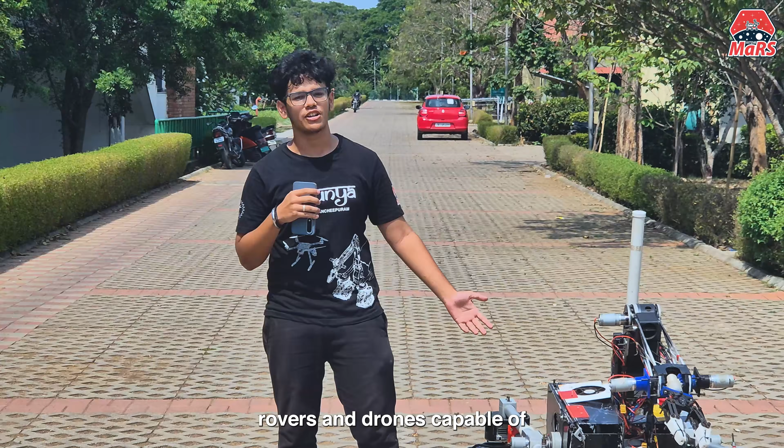Hi, we are Team Shunya, the Mars Rover Students Club of IIITDM Kancheepuram. We are an interdisciplinary team of 25 plus engineers from various backgrounds, mechanical, electronics, software, and science, all united for one goal: to design and build autonomous rovers and drones capable of navigating through some of the most challenging environments on Earth and eventually beyond.

Our team is headed by a team lead, assisted by a technical lead who oversees all technical operations, and a team manager who takes care of planning, logistics, and everything that keeps the team running smoothly behind the scenes. Each of our 6 sub-teams, mechanical, electronic, software, science, drone, and management, is headed by a dedicated sub-team lead who drives their domain forward and ensures every piece of the rover comes together as one cohesive mission.

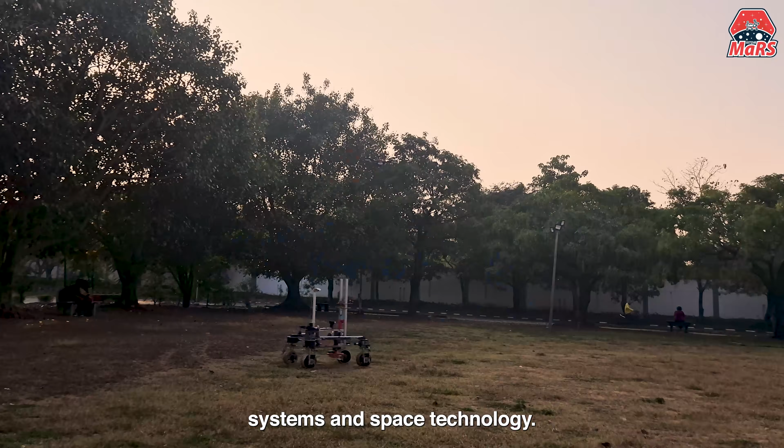Why ERC? At Team Mars, we are continuously driven by a relentless passion for autonomous systems and space technology. Over the years, we have continuously pushed our boundaries, achieving 4th place globally in the ERC Remote Edition 2025 and earning top innovation awards for our autonomous navigation stacks.

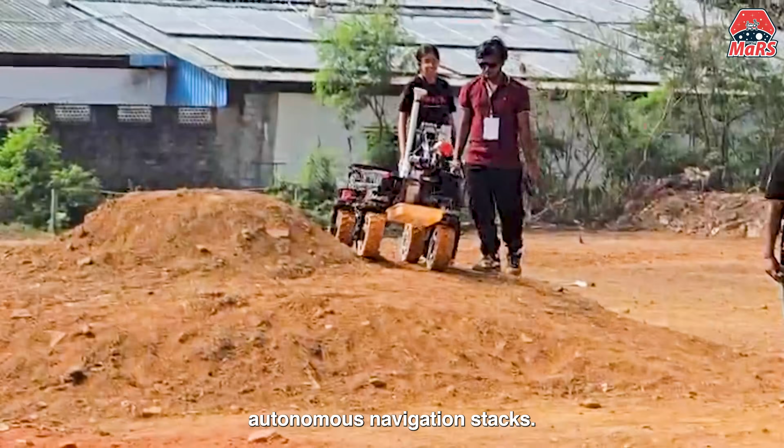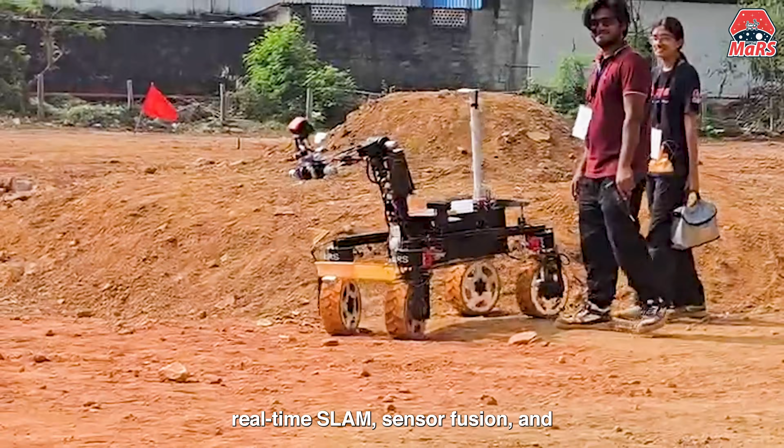We are running in ERC 2026 because there is no better proving ground for testing UGVs in space analog environments. It is the ultimate stage to validate our latest advancements in real-time SLAM, sensor fusion, and robotic manipulation against the highest international standards. For us, ERC is more than a competition. It is a vital stepping stone in engineering the future of extraterrestrial exploration right here at IIITDM.

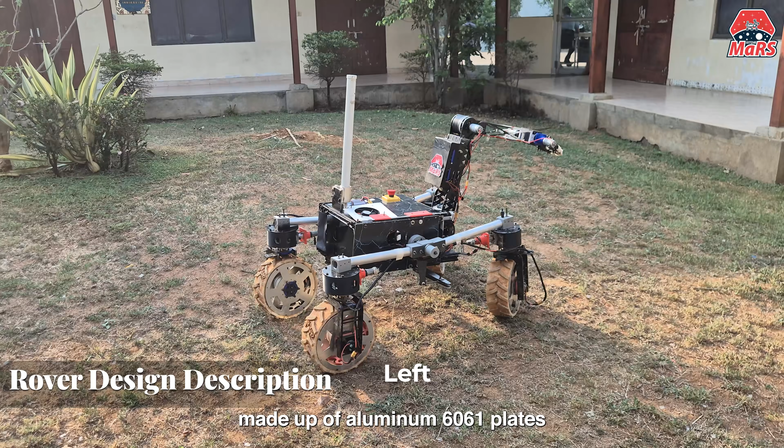This time we have developed a custom-made silicone grouser with a split chevron tread pattern mounted on a hybrid rim made up of aluminum 6061 plates and a reinforced PLA core. These provide excellent traction and shock absorption on loose and wet terrain, enabling the rover to overcome obstacles up to 25 cm. The wheels are driven by high torque 352 kgcm DC planetary gear motors through a bearing supported wheel mount for reliable performance.

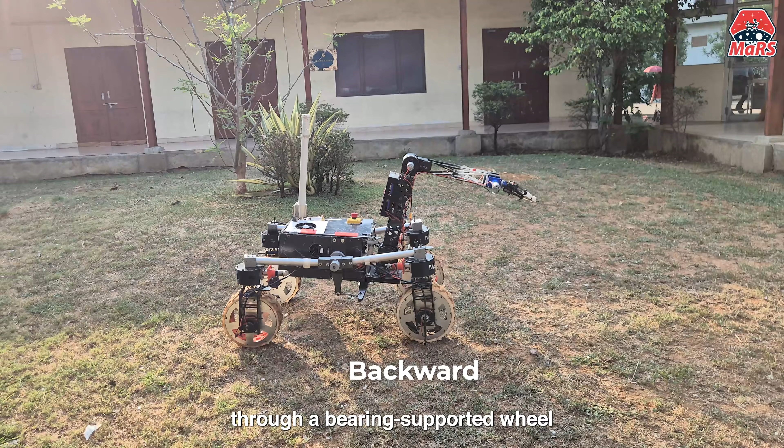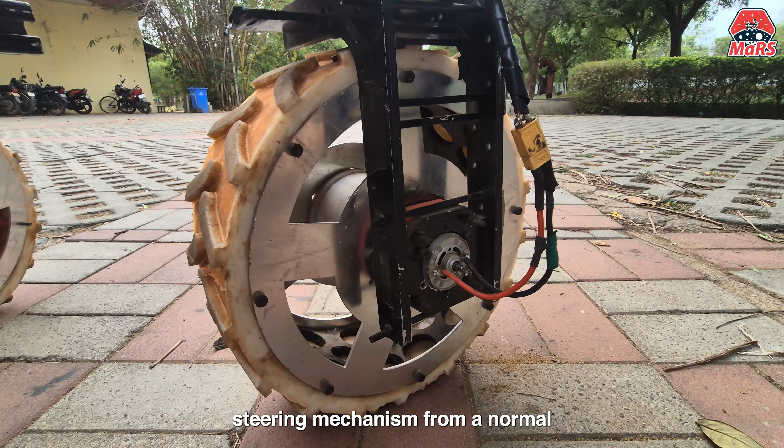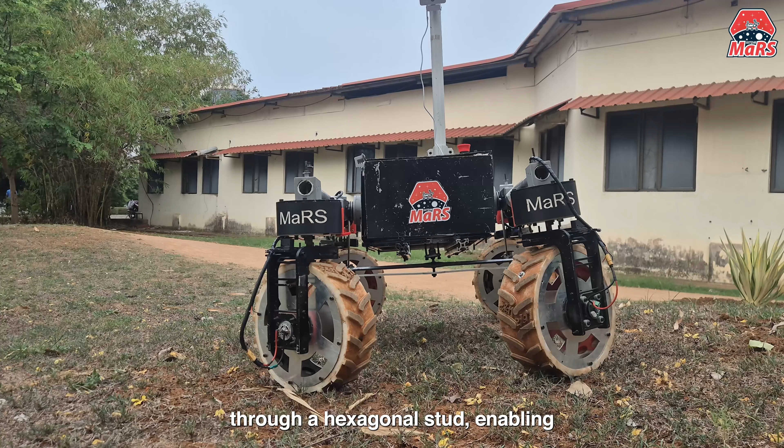The suspension integrates with a 4-wheel independent steering system capable of full 360-degree rotation. This time we upgraded our steering mechanism from a normal spur gear system to a 5:1 worm gear setup for more precise and controlled steering. The steering is powered by 150 kgcm DC planetary gear motors and coupled to the wheel mount through a hexagonal stud, enabling advanced mobility such as crab walk, spot turn and Ackermann.

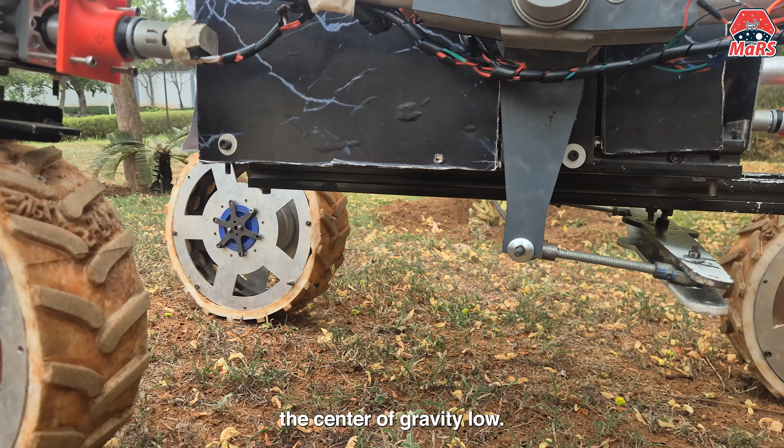We upgraded from a rectangular bar suspension to a 4-wheel V-shaped suspension with a cylindrical bar connected through a differential mechanism, improving balance, durability and ground contact while keeping the center of gravity low. Currently we are using 38 mm outer diameter aluminum pipes, with plans to shift to carbon fiber pipes for reduced weight and higher strength.

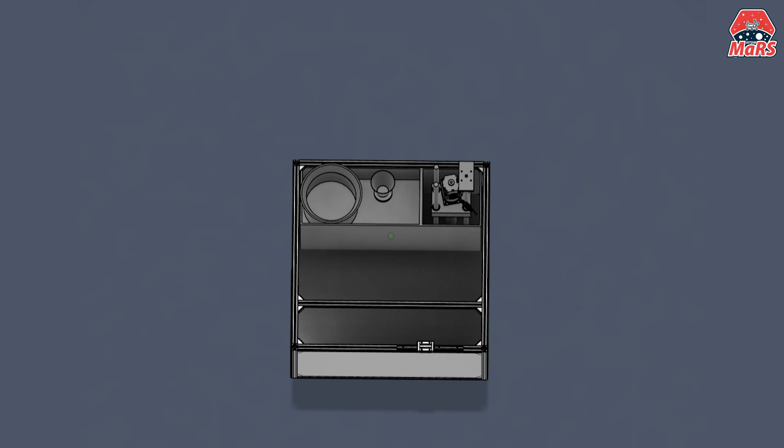The rover uses a 600 x 600 x 300 mm modular aluminum extrusion chassis reinforced with aluminum plates and a carbon fiber base plate for mounting electronics and software systems. The chassis is also integrated with the science cache and the manipulator arm on opposite sides for balanced weight distribution, while the suspension is connected through ball bearings and washers for smooth and reliable operation.

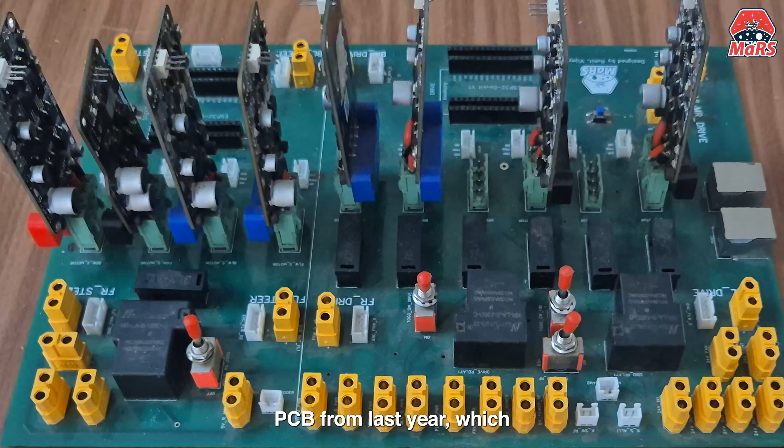At the core of our electronics, we use 4 ESP32 modules for steer, drive, manipulator and science, which use a PID loop mechanism for precise rover movement. We have upgraded our custom PCB from last year, which ensures better debugging and precise power distribution. We use a 24-volt battery supply, which is stepped down to 18, 12 and 5 volts respectively to control the motors and peripheral electronics.

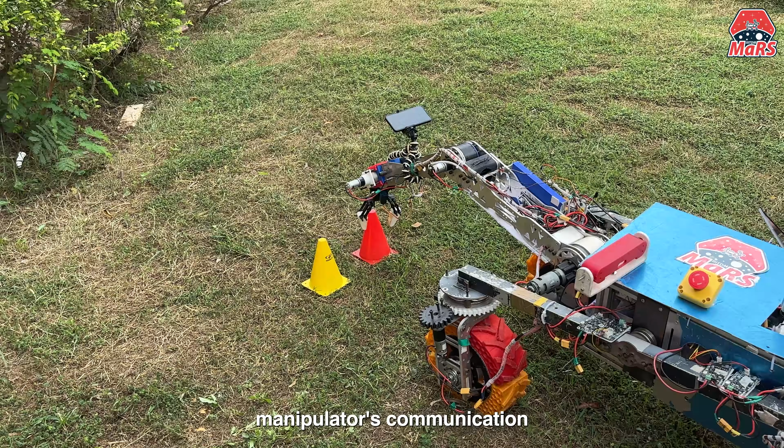We have also upgraded our manipulator's communication protocol from UART to CAN bus, ensuring better noise immunity and proper control over the motors. A relay-based kill switch is being used to control the power to the entire rover without affecting the communication system. A remote-based kill switch is being implemented which can be controlled from the base station.

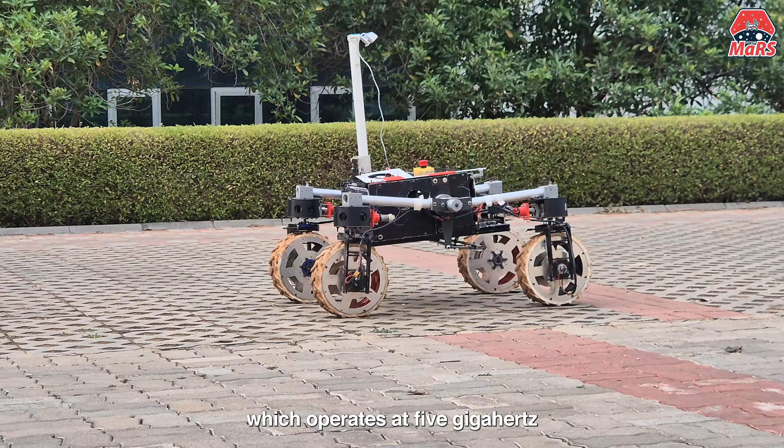For our communication with the rover from the ground station, we use a Ubiquiti Rocket M5 antenna, which operates at 5 GHz frequency, has more than a kilometer of outdoor range, and has a low latency link with the rover. For safety measures, we have hardware-based limit switches that restrict the rover's movement and get it into a safety position, such that it does not move unpredictably and uncontrollably during primary communication loss or in case of a component failure.

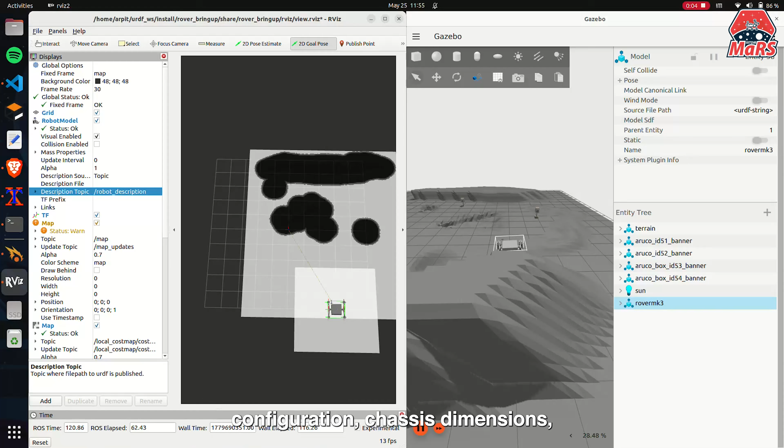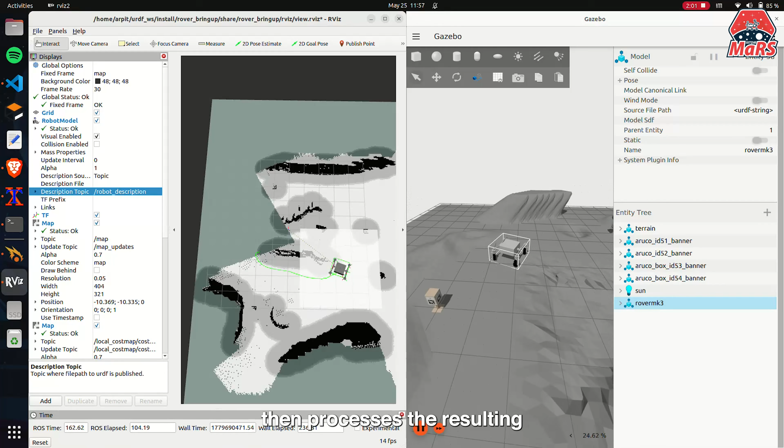A custom low-level controller then processes the resulting velocity commands for precise Ackermann drive, spot turn and holonomic motions. For environmental perception, our ZED 2i stereo camera captures RGB and depth data in real time. These images undergo filtering to improve depth quality, while ArUco detection and object detection identify targets in the scene. By combining these detection results with depth information, we compute accurate 3D coordinates required for navigation and manipulation.

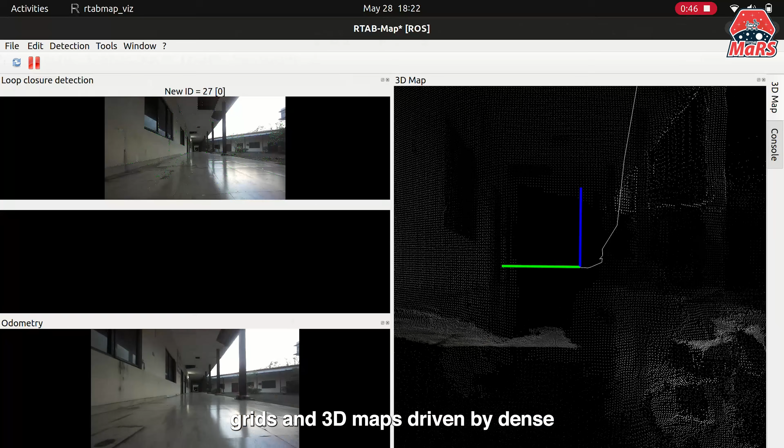For unmapped terrains, we run RTAB-Map SLAM, building real-time 2D occupancy grids and 3D maps, driven by dense depth images and visual odometry from the ZED 2i stereo camera. Wheel odometry, IMU and GPS are fused via an extended Kalman filter for robust global localization and state estimation.

The global cost map uses a voxel layer inflated for safe scaling, while the local cost map leverages the ZED 2i point clouds through a spatio-temporal voxel layer followed by inflation, giving Nav2 accurate dynamic obstacle awareness for reliable navigation.

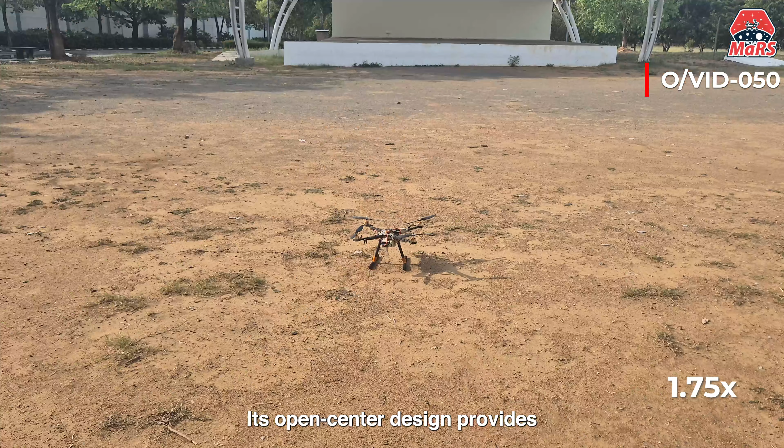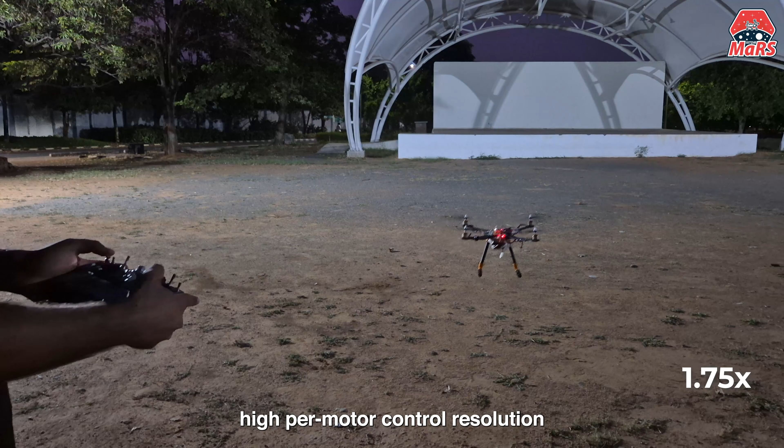Our aerial platform is built on the S500 quadcopter frame. Its open center design provides optimal avionics access and clean cable routing across all four arms. Propulsion is driven by 4 dedicated brushless DC motors rated at 1000 kV each, paired with an individual electronic speed controller. This isolated configuration ensures high per-motor control resolution and prevents fault cascading. A 4S 12,000 mAh LiPo battery yields approximately 20 minutes of operational flight time.

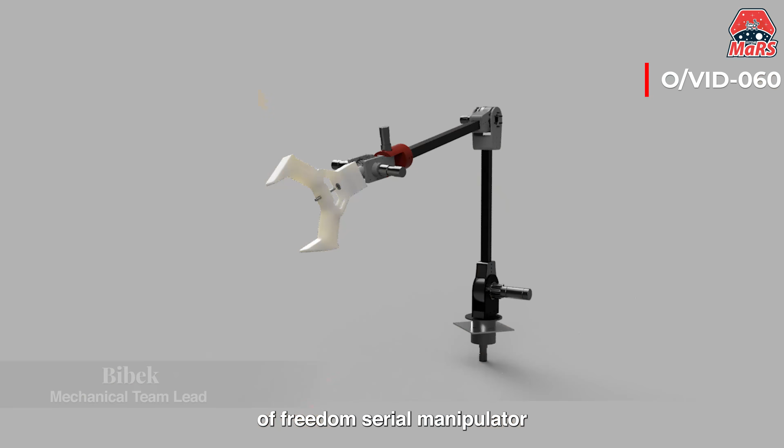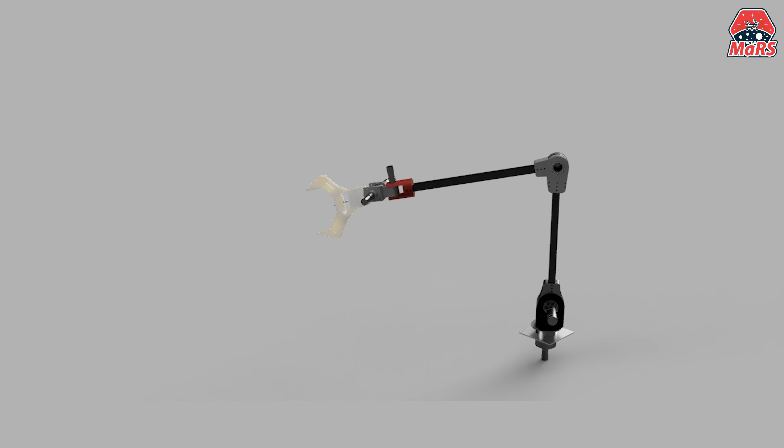We have designed a 6 degree of freedom serial manipulator with the primary joint using a custom developed cycloidal gearbox, providing high torque and minimal backlash. It has a 1.5 meter reach and 5 kg payload capacity. Removing the plates, now we are using 30 x 30 square bars with link lengths of 500 mm and 600 mm for link 1 and link 2 respectively.

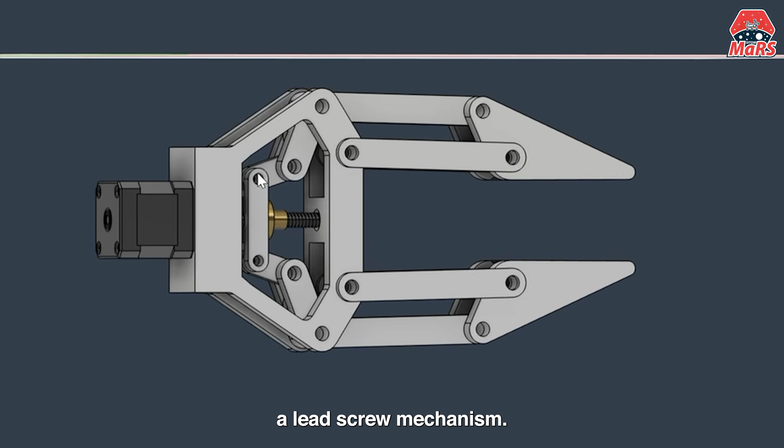A bevel gear differential mechanism coupled with two 150 kg DC planetary gear motors provides roll and pitch motion to the robotic gripper. We have changed to a dual 4-bar linkage gripper system. It is moved by motors using a lead screw mechanism. The two jaws are set 18 cm apart so the gripper can clear the obstacle and pick up rocks up to 15 cm in diameter.

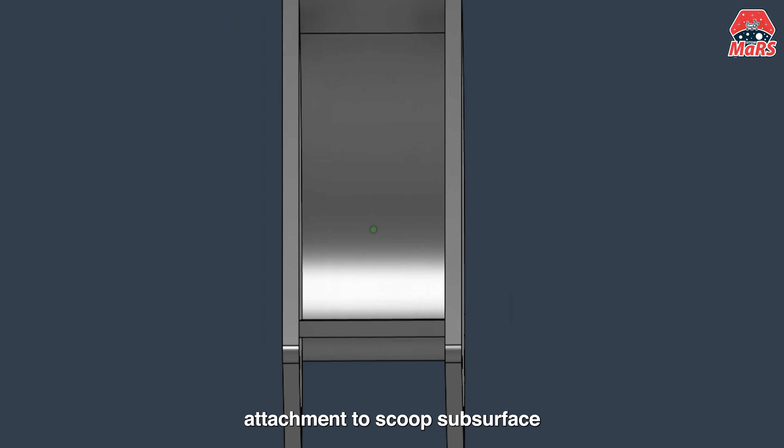This dual gripper setup is made for maintenance tasks and surface sampling. It uses a special finger attachment to scoop subsurface samples weighing more than 100 grams. By putting two grippers at the wrist, we made the manipulator more flexible and gave it more reach. This helps it do many hard jobs in the field with high precision.

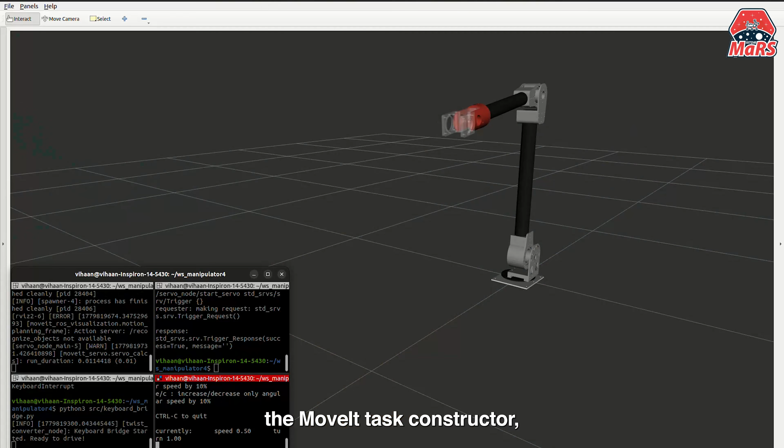Building on the perception data, the manipulator pipeline converts the target's 3D coordinates into the robot's base frame using TF2. To handle complex tasks, we use the MoveIt Task Constructor, breaking the operation down into simpler steps like approach, execution, and retreat. For final high-precision alignment, a wrist-mounted webcam provides close-range feedback.

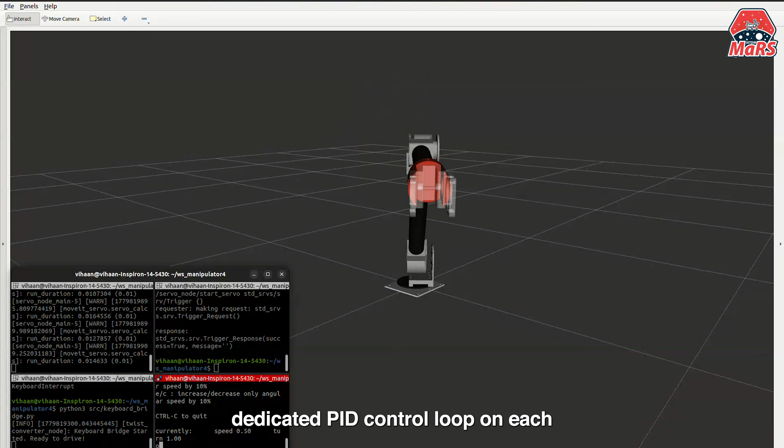MoveIt utilizes the RRT algorithm to generate a smooth, collision-free trajectory, while the TRAC-IK inverse kinematics solver handles fast, reliable inverse kinematics. On the hardware level, this trajectory is executed by a dedicated PID control loop on each joint, minimizing position error using real-time encoder feedback. Finally, the arm returns to its home position using encoders and limit switches.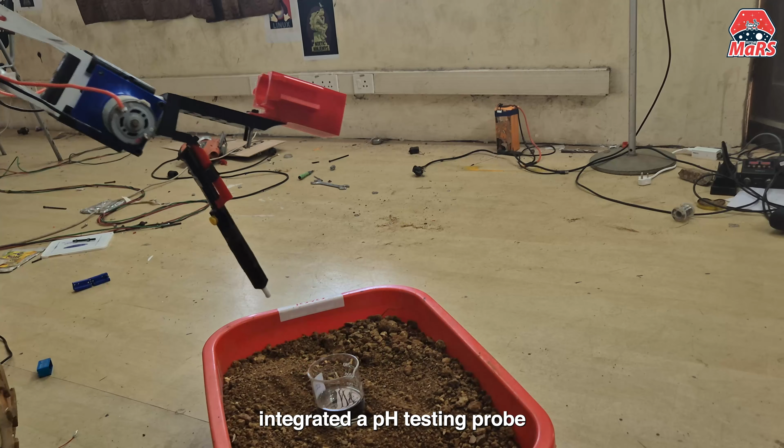For the Astrobio task, we have made another end effector design. For liquid environments, we have integrated a pH testing probe directly into the end effector, enabling real-time chemical analysis during the mission. Additionally, the end effector features a syringe-based suction system to draw and safely store water samples for subsequent examinations.

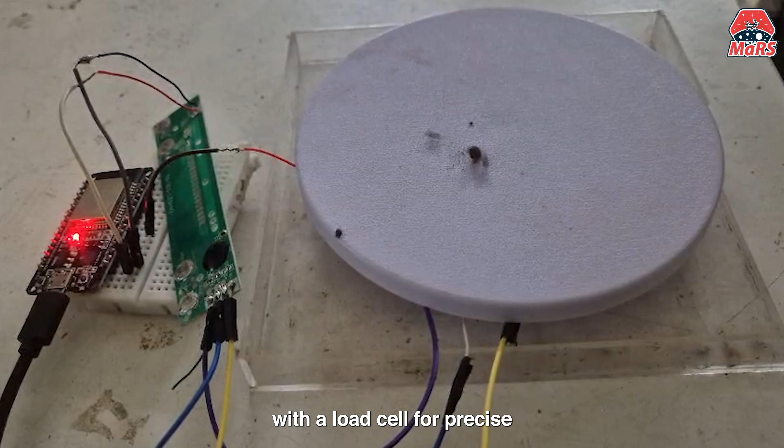Transitioning to our surface sample system, we feature a dedicated science cache. The science cache houses separate storage containers for regolith, rock, and deep core samples, each integrated with a load cell for precise individual weight measurement. For immediate surface operations, our custom engineered gripper seamlessly transitions between loose soil scooping and irregular rock collection. The jaw geometry and actuation were precisely modeled to guarantee secure sample retrieval under varying payload conditions.

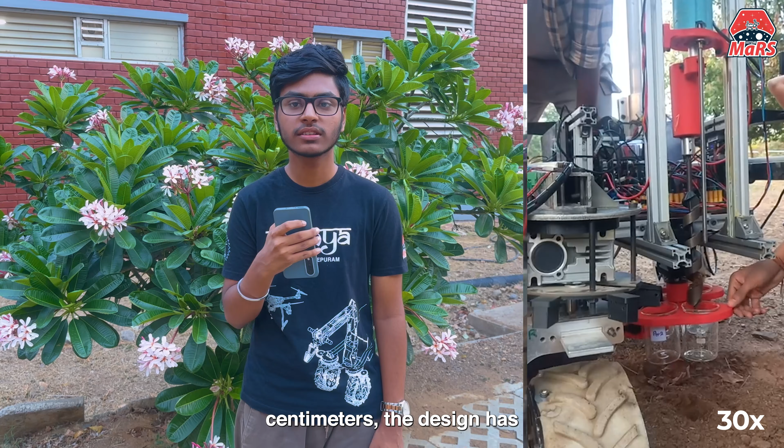For deep sample extraction, we utilize an Archimedean drill mechanism. While our previous design could successfully extract soil from a depth of 10 cm, the design has been optimized and upgraded to extract soil from depths of more than 30 cm.

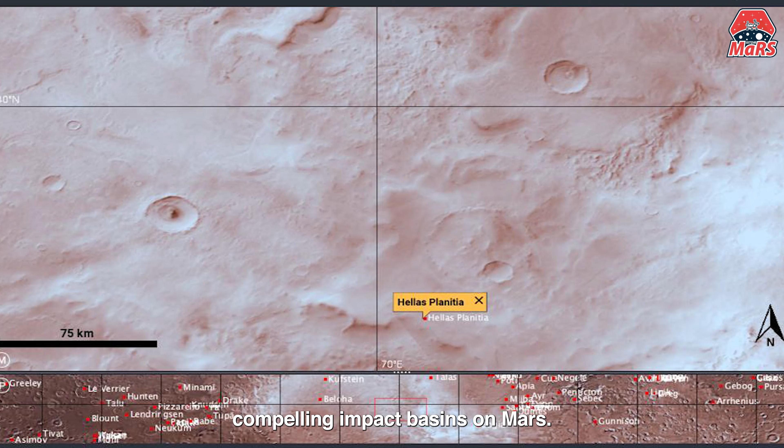For this year's science exploration mission, our primary target is Hellas Planitia, one of the most scientifically compelling impact basins on Mars. To analyze this terrain and map our traversal routes, we are utilizing JMARS as our primary visualization tool. As you can see here, the terrain presents unique challenges.

To safely navigate and characterize this environment, our rover will continuously monitor critical atmospheric data such as pressure, humidity, temperature, and altitude via our onboard sensor suite. To analyze the soil type, we are using a Munsell chart machine learning model such that we can analyze the color of soil and also estimate its properties.